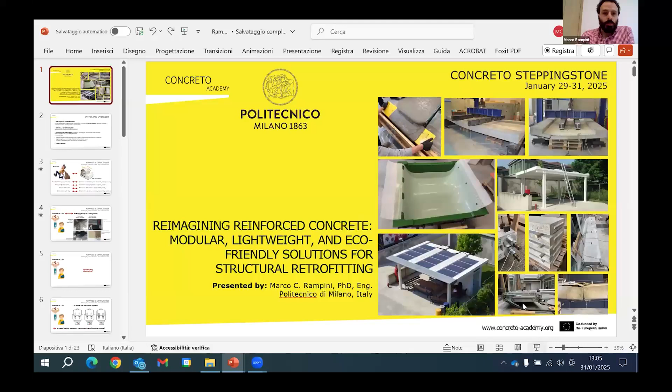Today I will try to present something that probably builds on some ideas you've already seen in these days related to structural retrofitting. The idea I had in mind is to present some of the results we performed at Politecnico di Milano in the last year.

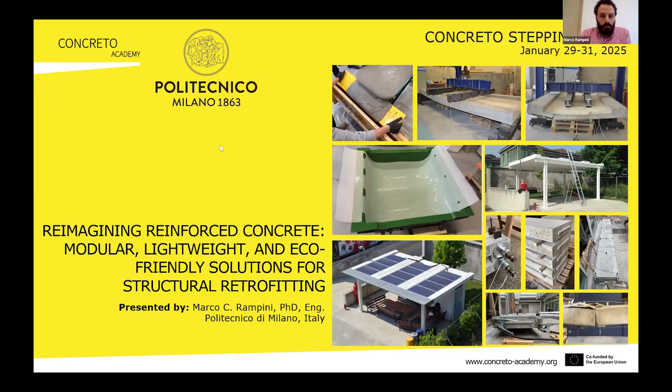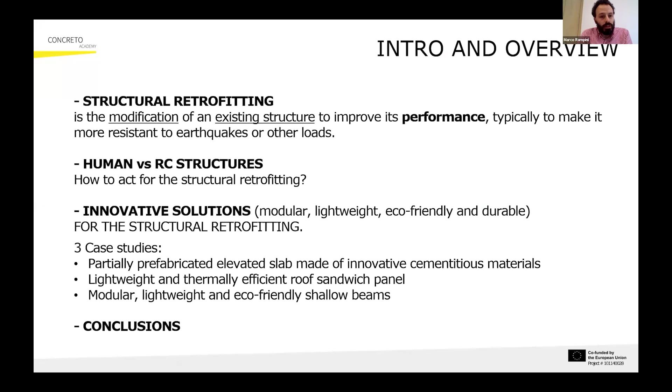With the idea of reimagining reinforced concrete for structural retrofitting. The most important aspect is to understand what structural retrofitting is, and for me it's the modification of an existing structure to improve its performance and typically make it more resistant to loads, such as earthquakes or others. I will go deeper into this topic, trying to draw analogies between humans and RC structures, then present the results of our research in terms of innovative solutions. At the end, I will do some conclusions for you.

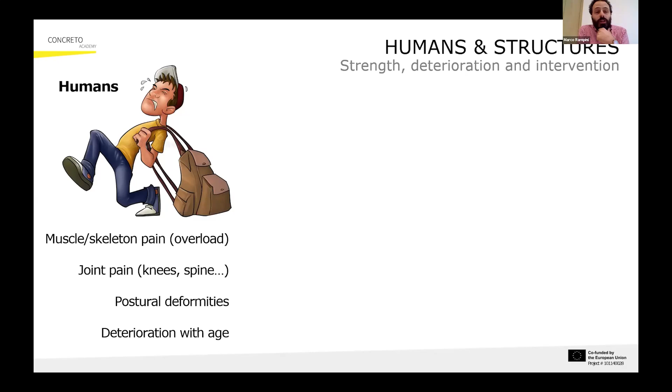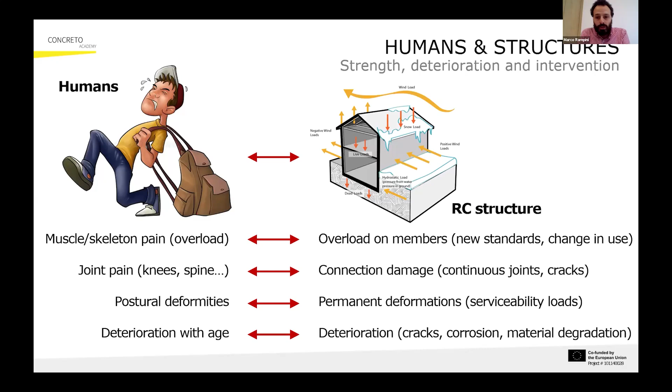For humans, for example, you may suffer muscle or skeleton pains, joint pains for your knees, spine, some postural deformities, deterioration with age in particular. RC structures practically work in the same way, so we can draw some analogies. We may have overloads on members related to new standards or changes in use, connection damage, permanent deformation, or other deterioration like cracks, corrosion, etc.

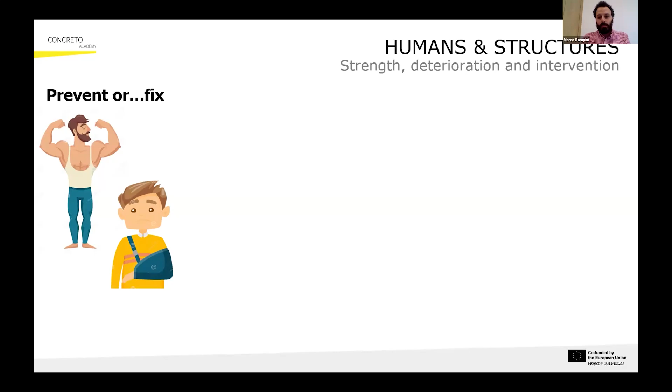It's very interesting to understand that we can prevent or fix the human body—prevent the pain by going to the gym, and then fix it if you have some problems. For the structure, it's very similar. You may already know that there are strengthening or retrofitting techniques that work before or after damage.

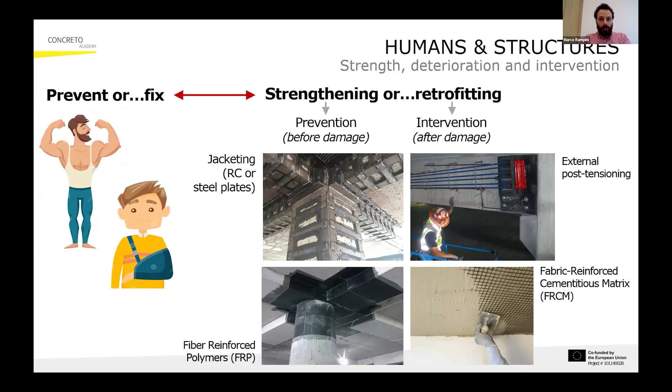For example, jacketing with RC or steel plates, external post-tensioning, or other innovative materials like FRP or FRCM, which work mainly on RC structures on the external surfaces. But the question is: is there any alternative with respect to prevention or fixing damage, to strengthening or retrofitting?

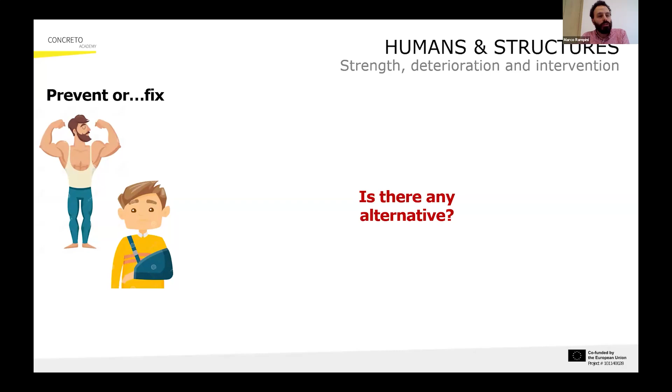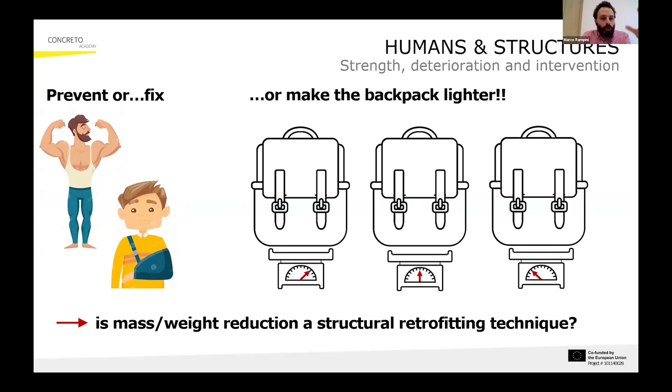In my opinion, one possible alternative is to make the backpack lighter. So you may work on mass reduction in order to have a structural retrofitting technique. What's important now is to understand which are the loads, which are the weights you have in the structure's backpack.

If you think about reinforced concrete structures, they are very massive. You need to think about this list of loads spread across different portions. You have, for example, external loads, named live loads—people, snow, wind, and similar. Then you have both permanent non-structural loads like pavement, systems, partitions, or facade elements, roof elements, floor, etc., up to arriving at the skeleton, the part which is most important in terms of structural behavior.

It's important to notice that, for example, the horizontal elements like floors or slabs and roofs represent a significant portion of the total weight of the structure. This is the point I want to underline in my presentation, in order to show you some examples of alternative solutions which can be included in terms of retrofitting.

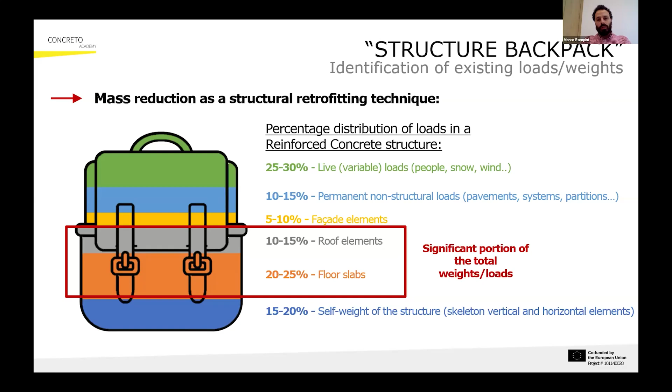To do this and understand the main advantages you may have, I started doing some very simple analysis—linear response spectrum analysis. I included different parameters related to grid shape, grid size, number of floors, and the different use of the building. I tried to stay between the typical on the left, 7.5 and 2.8 kilonewton per square meter for the weight of floor and roof, up to the lightest one.

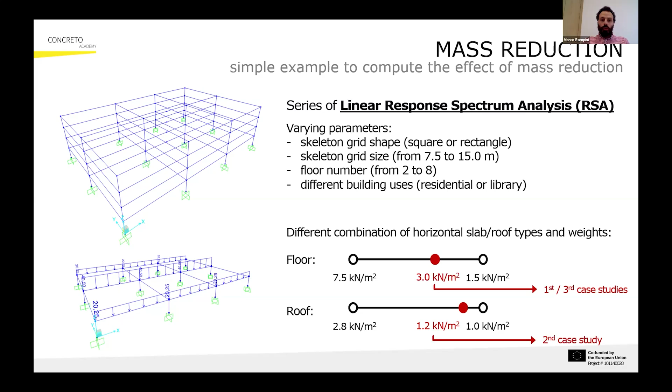Clearly the reality stays in between the two, because if you make something very, very light, you may lose something in performance. So I will propose three alternatives which stay above less than 50% in terms of weight compared to the typical and traditional solution—two cases for floor elements and one for roof elements.

In terms of results, after performing this analysis, on the left side you can see that a reduction of the loads clearly led to a variation of the section of the structural elements. But clearly, if you think about structural retrofitting, you cannot remove a portion of the columns, for example. So these are not the results we wanted to search for, wanted to understand, when speaking about the effect of mass reduction.

We may think that, clearly, maintaining the same dimension of the column, of the beam, of the structural elements, we may have clearly less stresses. So due to this, the lower actions we have are related to the mass reduction.

On the right side, I may show you also other important aspects related to, for example, the reduction of the bending moment in the joint at the foundation level when you reduce the masses. This is quite typical, especially in case of seismic action.

So starting with these two possible effects, it's immediate to think that you may have a solution which can change structural masses in order to have a reduction of the action on the structure itself without changing the geometry of the structural element.

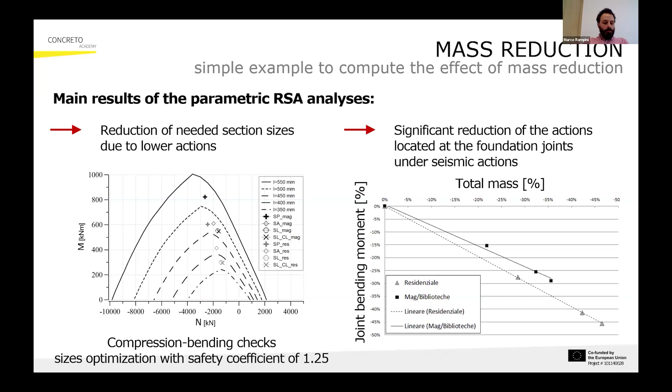I will now show you some examples of our research. I will start with this, which is the result of a private research project conducted by Politecnico di Milano together with a company based in Milan. The idea was to realize a slab, a partially prefabricated slab made with innovative material, and the goal of this research was to arrive at the experimental validation of this solution, where structural efficiency and performance are related to the use of new materials.

I will show you them later when I'm speaking on this, and then discuss how to improve the construction speed and make the solution lighter.

On the bottom right side, you can see that the distance between the beams in the solution I'm presenting is twice the one in the ribbed slab with hollow clay blocks, with a distance between beams close to 1 meter. This means you have twice the distance between beams, using less material, lowering material consumption in view of sustainability.

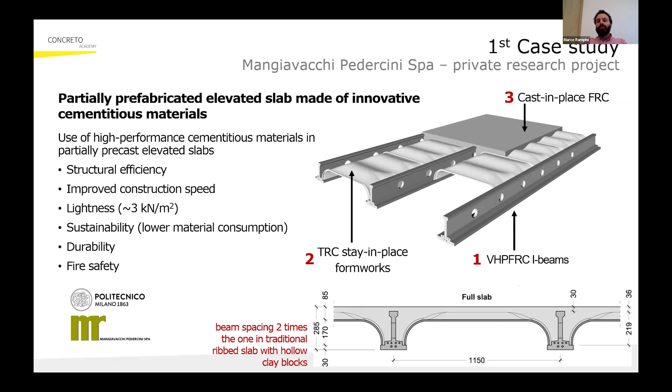This slab is realized with beams, with 1 meter distance between them, and disposable formwork, which are very thin—I will speak about them later. Then, at the end, there are some procedures to cast in place material such as FRC.

Here I want to show you the results of the beam elements. They were realized with very high performance fiber reinforced concrete. The idea was to reduce the section using concrete with a capacity of 120 megapascal in compression, adding steel fibers in high dosage to achieve a hardening behavior after the formation of cracks in tension.

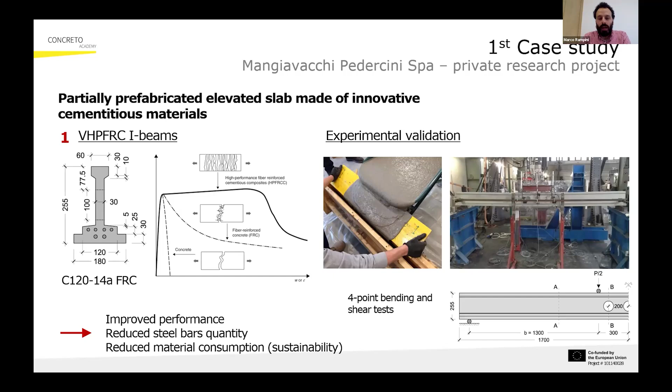This means you may improve performance but especially reduce both steel bar quantity in terms of longitudinal bars, but especially the stirrups. You can also reduce material consumption. Even though the material itself has a higher global warming potential compared to typical reinforced concrete, you use much less quantity, achieving an overall reduction of those parameters, making the solution sustainable. We tested prototypes and experimentally validated this kind of beam.

Moreover, thanks to the very thin shell, these elements are very, very light—30 kilograms each, around 1 meter by 1 meter in plan. This means two operators can move them very easily, making the process very rapid.

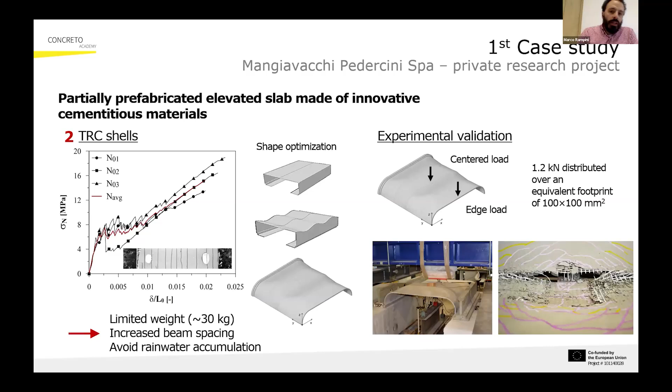After that, I want to propose another important solution, which is the result of a project of Regione Lombardia related to industrial buildings. The idea behind this project was that it could be interesting to introduce a new roofing panel to have a lighter solution, around 1.2 kilonewton per square meter, improving structural safety and durability.

This is thanks to the use of new material, very similar to the one I showed you before, and it also includes thermal efficiency thanks to the sandwich shape of these elements, including an EPS layer inside, and also, with the U shape I will show you later, compatibility with photovoltaic devices.

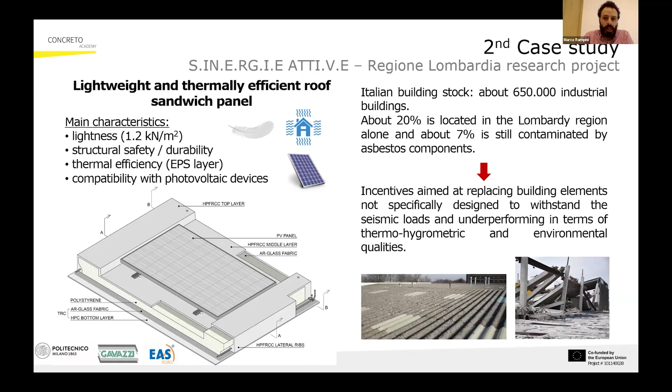In this way, we may obtain something which is not only structural retrofitting, due to the fact we have a reduction of masses, but we also obtain something more in terms of energy, thermal efficiency and production of energy. So this is the section of the elements.

On the top side, we have an entire crust of HPFRC, very similar to the high performance fiber reinforced concrete I showed you before, and a very thin layer on the bottom side in TRC. I already mentioned that thanks to the TRC, we can work with very thin members.

After the optimization of the material, in order to arrive at the production of the specimen, we did something also in between: tests on small sandwich panels. The EPS inside, intended for insulation and thermal dissipation, is also a very important element in terms of structural behavior, because it has to connect the top and bottom faces and guarantee complete connection between them. So we had to test this before arriving to the prototyping you are seeing on the right side.

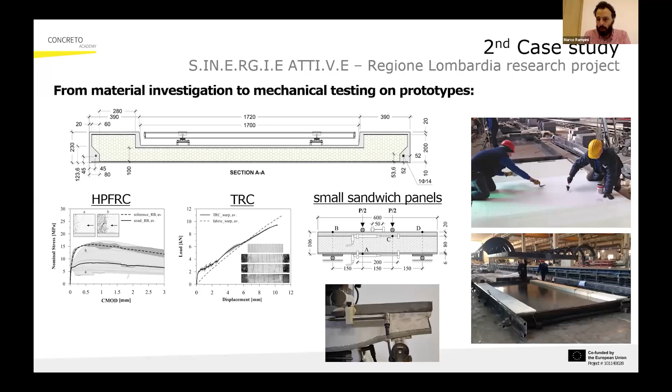After that, as before, we arrived at experimental validation and performed a list of tests. The panels are 5 meters long, as you can see on the left side, they were very big. We decided to also test those specimens for use in industrial buildings, also under fire. On the right side, you can see an example and the scheme of a test under fire, and also the last part of the test.

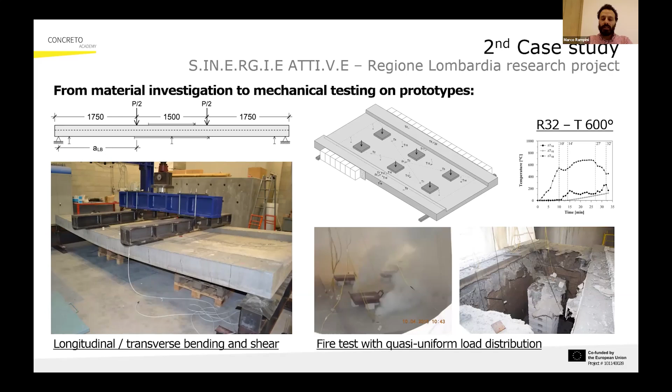But we had the chance to verify that the minimum requirement, which is 30 minutes after the starting of the fire, is satisfied. After that, after the closing of the project, we had the chance to place and dispose 3 of these panels close to the campus of Lecco.

And also to add 3 photovoltaic devices. We had the chance to monitor them in order to understand, and you can observe the different lines on the bottom left, the different variation day per day, thanks to the fact that there was sun, so day and night.

And after these 7 years of exposure in this unsheltered environment, we had the need to remove this panel from the campus, and we decided to repeat the same mechanical characterization on the panel we had at the beginning.

In the figure I'm showing you, the red curve is the aged panel, the gray and black are the previous ones, the time 0 ones. You may see that there are some variations in terms of behavior, but no variation in terms of maximum capacity.

And there's an increase in crack control, thanks to the fact that this innovative material continues to undergo hydration throughout its entire life, and increases its performance.

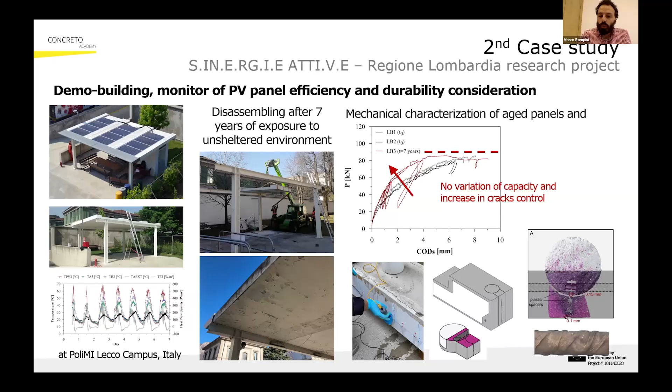Moreover, in order to be sure that the unique steel reinforcing bars we had in this panel don't have any problem of deterioration, we checked them by monitoring both the corrosion potential and doing carbonation tests. On the right side, you can see a portion of the bar, which is completely clean after the 7 years of exposure, confirming the solution is durable as we intended from the beginning.

And the last example I wanted to show you is more recent, from 1 year ago: a modular, lightweight, and eco-friendly shallow beam. This was realized within the Metabuilding EU innovation project, together with two companies, Tesis from Salerno and re-fer from Switzerland.

The idea behind this was to use material from the construction of previous buildings in order to have recycled aggregates, and also to use bars made of shape memory alloy material to connect the different modules of this beam, giving the chance to use them across different life cycles, to remove the shallow beams and recreate them again, making it more reusable.

Moreover, this bar, thanks to its capacity to have memory of its preliminary shape, can be a solution for post-tensioning. So they are not only working to compact together all the different modules you see on the top left, but also to add post-tensioning, similar to what you have in post-tensioned reinforced concrete.

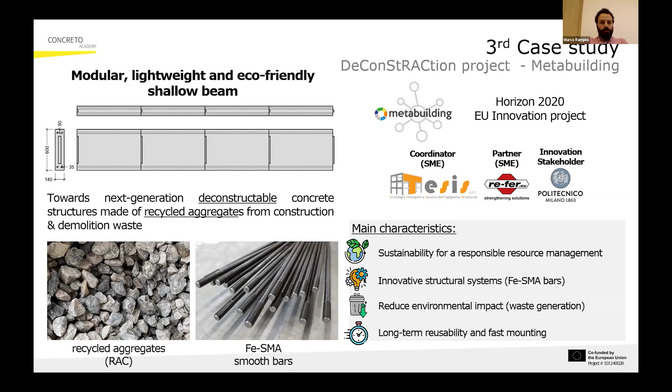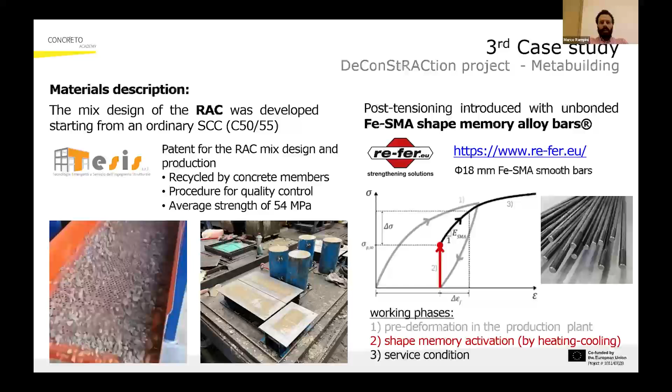The RAC, recycled aggregate concrete, was developed starting from a solution with 55 megapascal resistance in compression, and comes from a patent from the Tesis company. Thanks to preliminary analysis of this material, we arrived at an average strength of 54 megapascal, which is perfectly in line with what we had in mind.

On the right side, you are seeing the shape memory alloy bars, produced by re-fer. I'm trying to explain with the graph how they work. The gray line represents the pre-deformation in the production plant, so the material starts to have a new shape, longer than it was at the beginning.

After that, when you use them in construction, you have the activation phase, in which by heating and cooling you have elongation of the bar, and then it comes back to the original shape. So it will be shorter than the dimension you had when you placed it in the structure, and then you can use it in service condition.

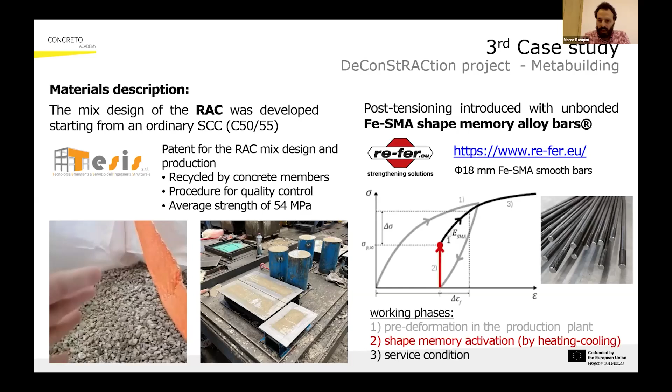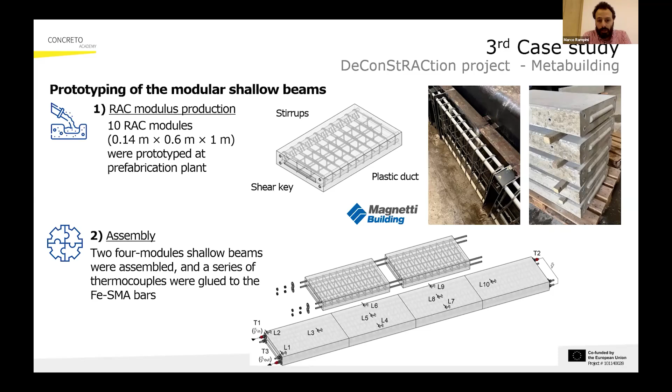But it will be clearer in the next slide, because we arrived at the RAC module production in a company, Magnetti Building, close to Lecco. We assembled the different modules, placing the bar inside and connecting the modules to each other. We also applied thermocouples to control the temperature we arrived at. Then there's the prototype, the post-tensioning phases.

In the first phase, you can see on the top right graph the phases of temperature variation. We introduce a current on the bars in order to increase the temperature up to 360 degrees, and in this phase there's an elongation of the bar.

The different modules in this phase are not connected to each other, so they are free to move. But then in the cooling phase, there's a shape shortening of the shape memory bars, and this creates the post-tensioning effect. On the bottom graph in the middle, you can see a blue line representing the equivalent strain measured on the external surface of the element, confirming we realized the correct post-tensioning we had in mind in the preliminary design.

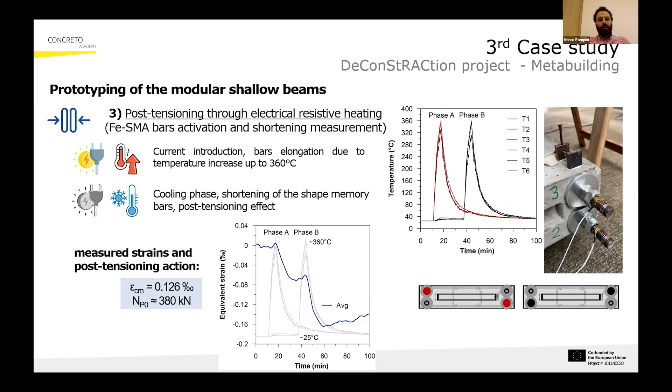But the most important aspect of this kind of element is that you can reuse it more than once, especially the shape memory alloy bar, because by repeating the same process—pre-deformation, heating and cooling—you can remove them and introduce post-tensioning again in another solution. So in scenarios with 50% or 100% reuse of those materials, you see an extension of service life but also a significant reduction in global warming potential, making this solution eco-friendly.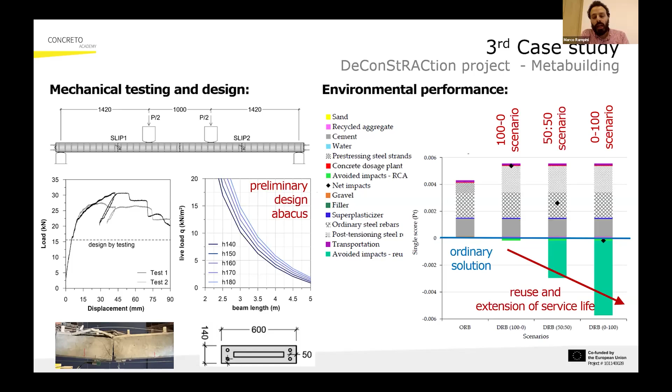Mass reduction may be a structural retrofitting technique. As for humans, it could also apply to structures, and due to lower loads, it could be an alternative or used in parallel with strengthening or retrofitting. It's more important when you have to preserve the architectural significance of the element without modifying the shape of the skeleton or its functionality. Maybe you can only change what is less significant architecturally, such as the floor, and thereby reduce the loads.

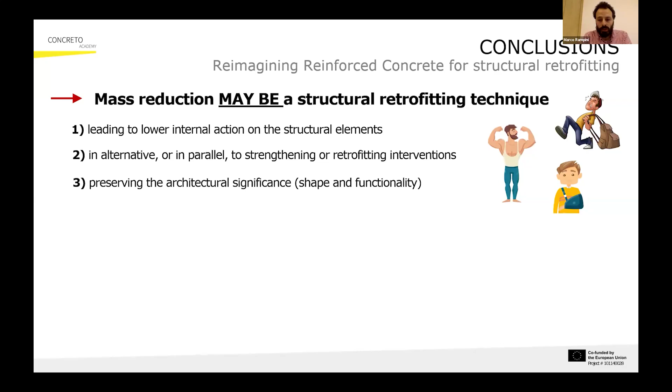So how can you do it? I think you can reimagine reinforced concrete to obtain innovative solutions which are lighter, eco-friendly, sustainable, modular, and so on. This can only be done through research and using new materials, like the high-performance material I showed you, and using shape optimization to achieve something that has performance but is also less invasive on the structures.